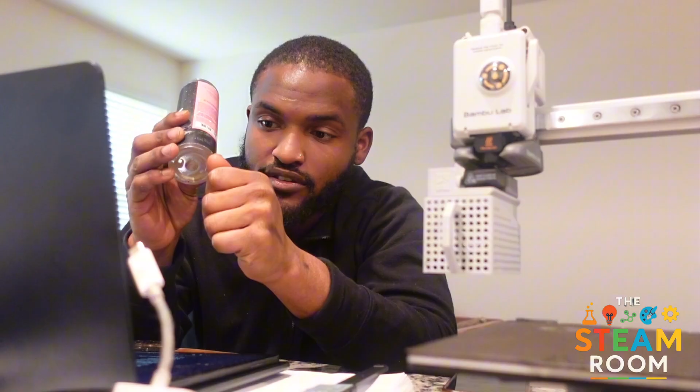So for instance, if it was this spray bottle, say if I wanted to make a cup holder for the spray bottle. A lot of times people will guess. They'll use their thumbs or some type of ruler, or not even a ruler. They'll just be like, oh, this looks like 2 inches, and they'll go from there, only for it to be a waste of filament and time because it was actually 1.57 millimeters.

But how are you gonna know that? How are you going to know the difference between 1.57 and 2 millimeters? Well, I'm glad you asked. This is where the caliper comes into play. Now, today I'll show you how to use a caliper in the right way. You can design parts that actually fit.

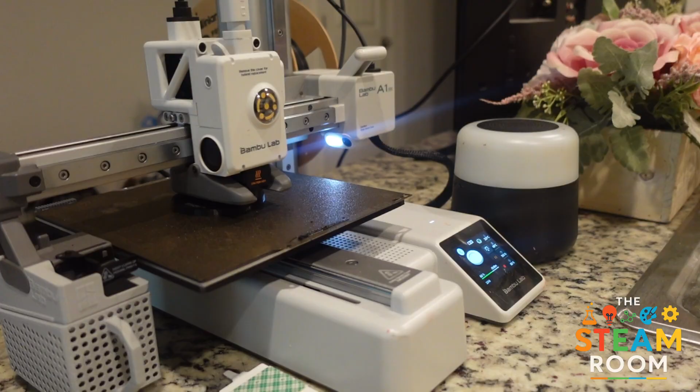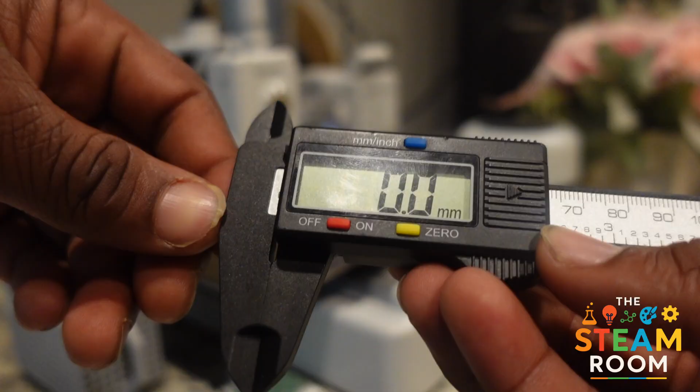So, first things first, what is a caliper? A caliper measures exact size in millimeters or inches. It tells you the width, height, depth, and inside spacing of an object, which is exactly what 3D printing needs. So think of it as your go-to for 3D printing anything. If you want it to have a snug fit, you're gonna want a caliper in the mix. Start at least with the outside measurement, you know?

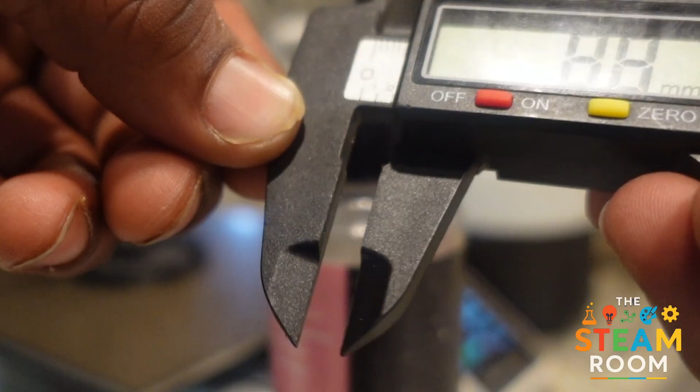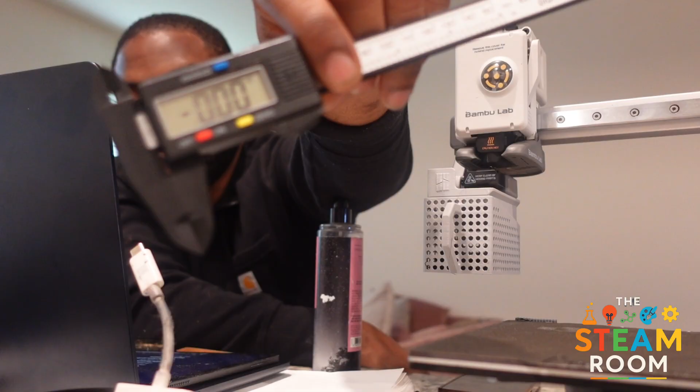So to measure the outside, place the jaws, so these two things are the jaws, and you're gonna place them around the object and gently close it. Now, before you start though, you're always gonna make sure that you turn it on, make sure it's set to millimeters and not inches, well, depending on your preference.

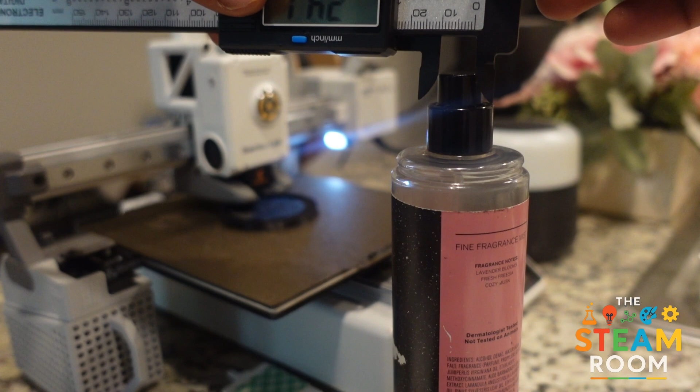And you're gonna hit this 0 button. That way it zeroes it out. Now every measurement is gonna be accurate. You're gonna take this, slide it out a little bit, and just gently close it around the edge of the bottle, or whatever it is you're measuring. So now I know that this is 48 millimeters on the outside of it. So now I can make a cup holder or something for it to simply fit snug inside of.

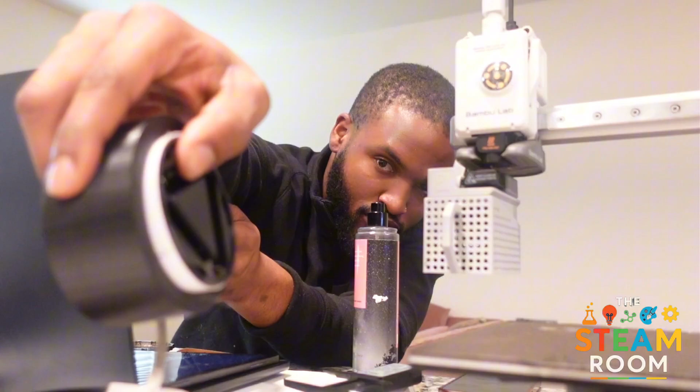Now for holes or gaps, you use the smaller inside jaws. This is perfect for designing clips, holders, or press fit parts. Now press fit parts are parts similar to this. I made this design for a puck light. Simply put, it's a design like this that when you press it down, it fits snug. Now, those are the basics of a caliper.

But now that we know the basics of a caliper, it's time to use our knowledge and apply it into Tinkercad. Now, for this design, very simple, very straightforward process. You don't have to do anything crazy. All we're gonna do is drag and drop a simple cylinder onto our work plane. So this is what it looks like. Let me show you.

First things first, when we're in Tinkercad, I always change the name to whatever it is I'm working on. So cup holder, spray bottle. Just so it's easier to work with. And you're gonna drag and drop this onto your workplane. Holding shift, you're gonna scale it out, pressing one of the red squares while making sure it's highlighted red, and hold shift, scale it out.

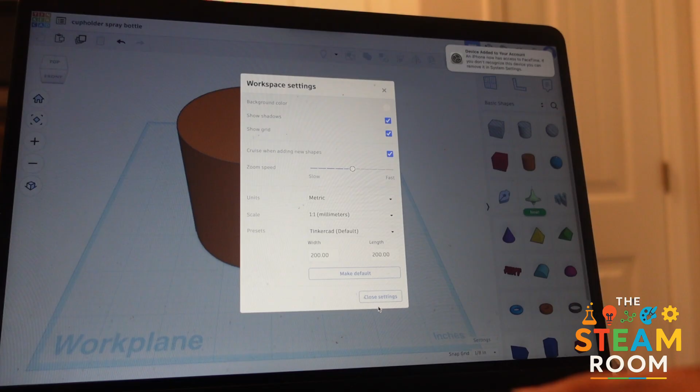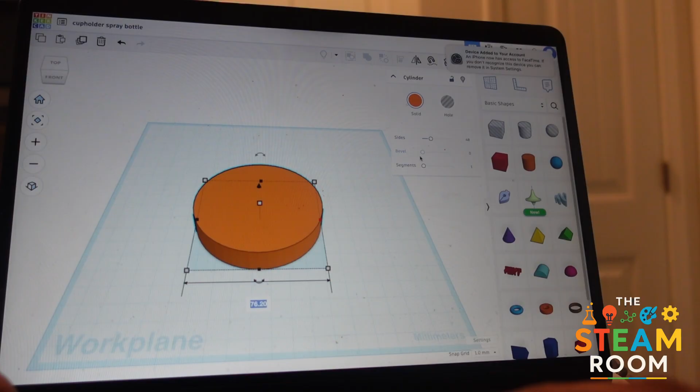So now that this is scaled out, next thing I'm gonna do, scale this down. Now we're just making a simple cup holder. So for this, I always start with the negative space. Turn it into a hole, but I know that it is 78.

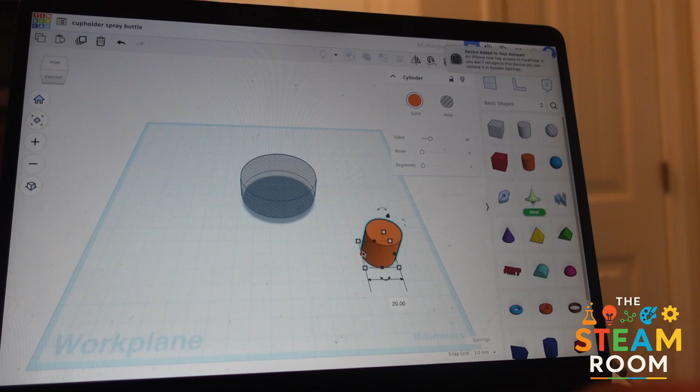So this is good because I know when I scale this out, I scale this down. Boom. So this is what we have so far. So this is the negative. This negative space is supposed to represent the spray bottle, the coaster, whatever it is we're trying to design for.

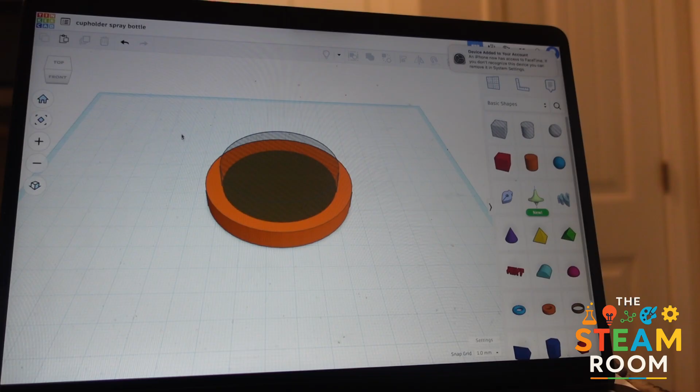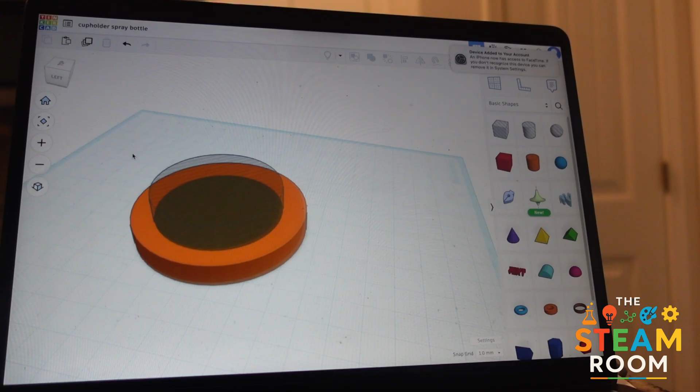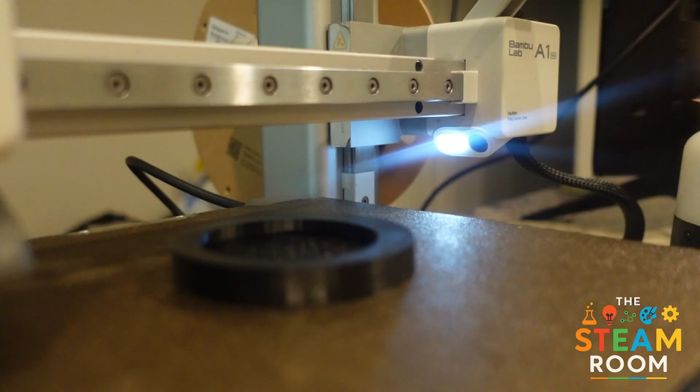Now, what I simply did was drag and drop another shape to act as what we would actually see. So what would go in here. So you can scale it out as much as you want, depending on the design and your heart's content, really. And after you do that, if you're satisfied with it, you can just go here and group them, and boom. Now, this is a quick, simple design.

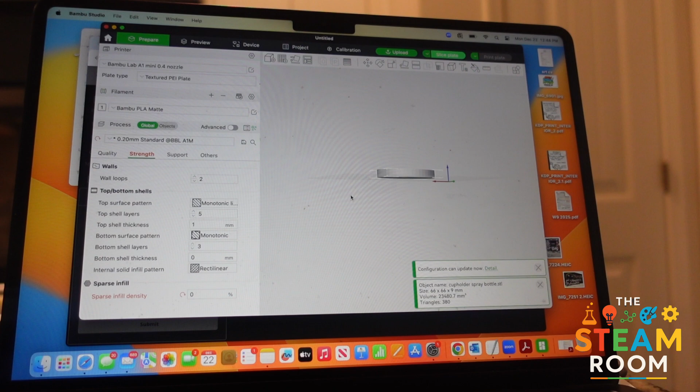So I'm gonna go here, I'm gonna hit export, and I'm gonna make sure it's selected as STL. Select the STL, and then you're gonna drag it and put it into your slicer. In this case, I'm using the Bambu slicer to do this. And I'm using an A1 mini printer, so it's already connected. Supports and strength, I don't want to give it any strength or support. I'm just gonna slice the plate.

It says it's gonna take about 20 minutes. Print plate. And send it off to the printer. Now we wait for it to connect.